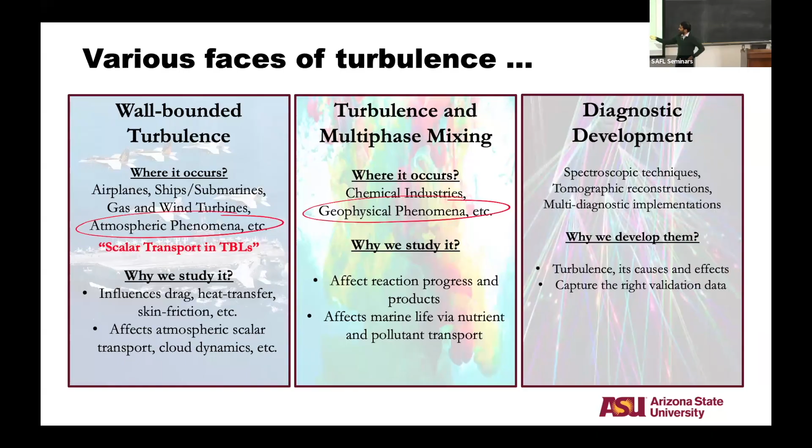For today, instead of going through all of those things, I'll focus on two specific aspects. The first one is scalar transport in turbulent boundary layers.

Is this working? Yes, it's working, I think. Okay, thank you for that.

So we're going to look at scalar transport within turbulent boundary layers. This basically marries my PhD work with my postdoc work. The other topic I'm going to broadly cover is separation over textured surfaces. These could look like very different problems application-wise, but the problems scientifically come back to what happens within a high Reynolds number turbulent boundary layer.

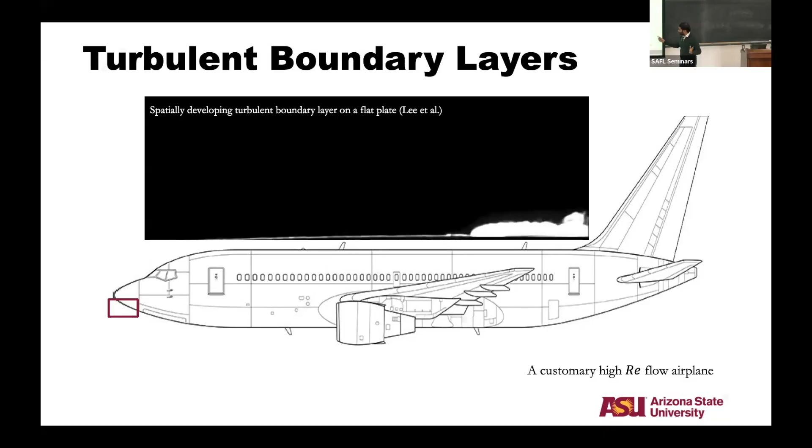I don't have to go through this in great detail because a lot of you here is already familiar, but just to establish nomenclature, and as is customary when we talk about a high Reynolds number boundary layer, here is an airplane. If we want to visualize this, we're basically overlaying water flows on top of an airplane to give an idea of how a boundary layer would develop.

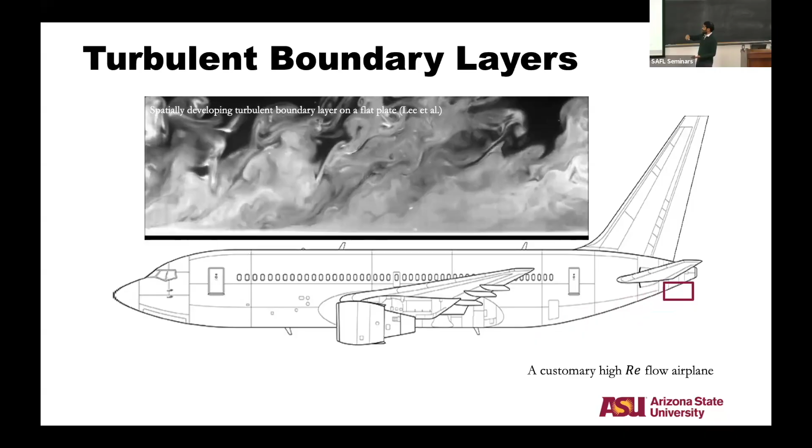As you see, as the boundary layer goes further and further downstream, you get a much wider range of turbulent flow structures, and the boundary layer gets much thicker. That basically is the essence of a high Reynolds number turbulent boundary layer.

The reason we want to characterize this is because we all live in one of those, and these turbulent structures are essential for transporting pollutants, particulate matter, etc. The other big reason we like to study this is because these occur over airplanes, like I just showed, and we spend ridiculous amounts of fuel to overcome the skin friction drag that comes and is modulated by a lot of these turbulent processes.

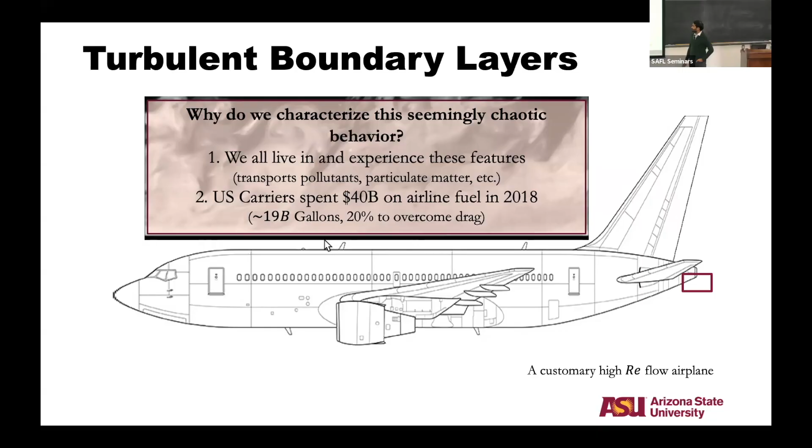Again, quickly redefining what a high Reynolds number boundary layer is, so that we're all on the same page - this is a very nice demonstration that Nick Hutchins from University of Melbourne once demonstrated. We can define Reynolds number as the ratio of the largest to the smallest scales.

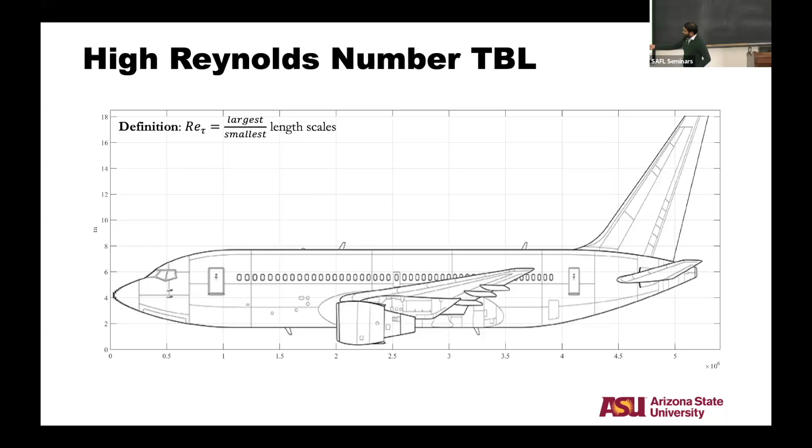If we look at the airplane and look at the boundary layer development as the Reynolds number increases, we like to look at it on a logarithmic scale. If we look at the log scale, one of the highest DNS, Re-tau of 5,200, is probably somewhere on the nose of the airplane that we typically travel in. One of the highest high Reynolds number laboratory experiments pushed this by a few tens of thousands from here.

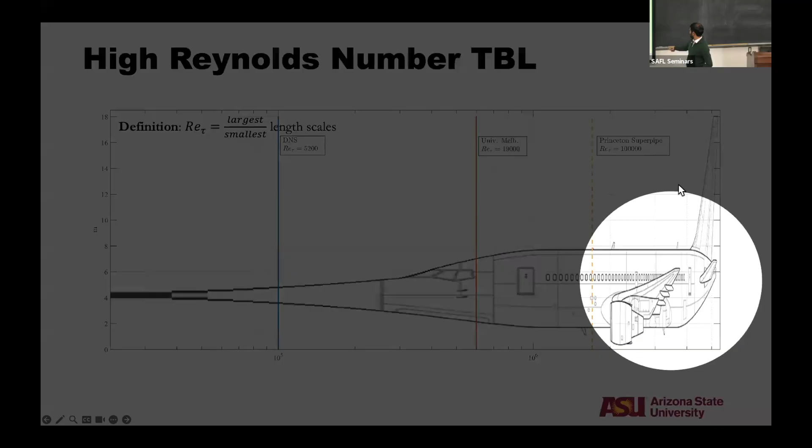So I'm talking about very well resolved turbulent boundary layers in a laboratory, somewhere in the cockpit, right? And if we look at the Princeton super pipe, they talk about very, very high Reynolds numbers within the laboratory, we're probably somewhere in the business class up there. So my coach class gives us very high Reynolds numbers, right?

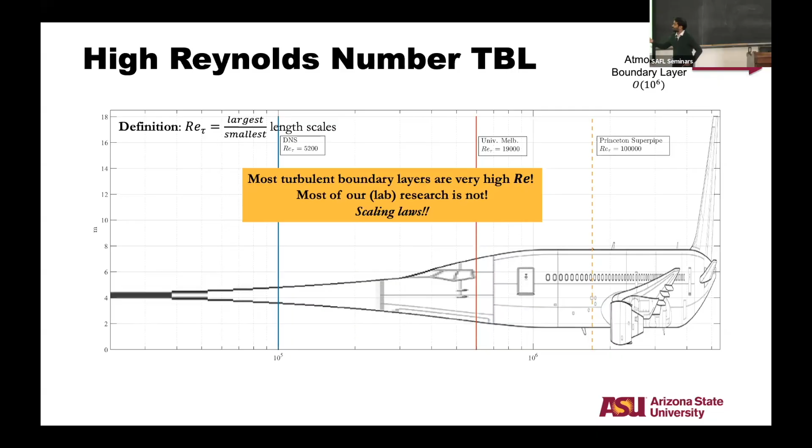An atmospheric boundary layer is probably somewhere else, right? We know that it's probably of the order of 10 to the 6. The point I'm trying to drive is most of our boundary layers are very high Reynolds numbers, but most of our laboratory research is not. And we heavily rely on scaling laws to bridge this gap, okay?

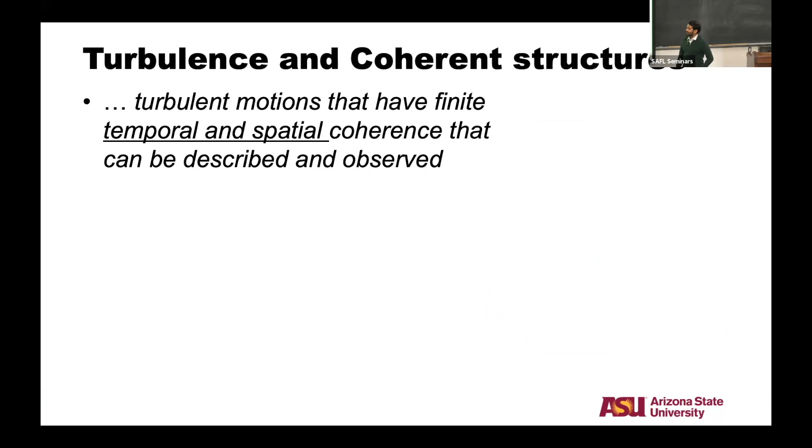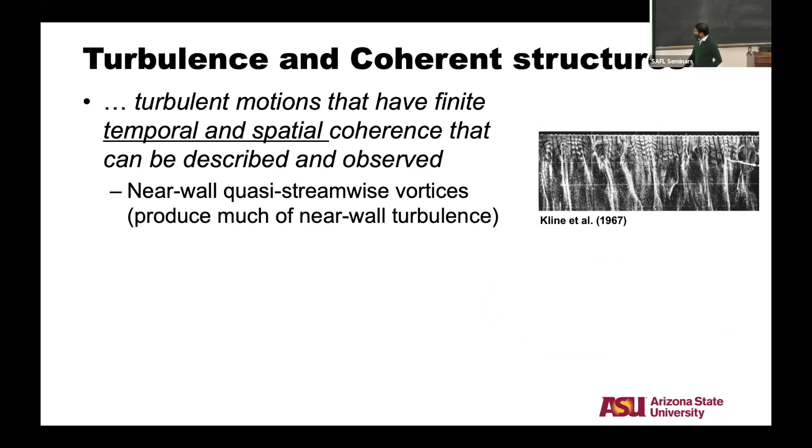I quickly also want to talk about turbulence and coherent structures. Coherent structures we can basically define as motions that have finite temporal and spatial scales that can be described some way statistically, right? And the most important ones, to simplify, are the near wall quasi-streamwise vortices, and the large and very large scale motions that happen outside of a boundary layer, in the outer regions.

We would like to pretend that these are Reynolds number independent and fairly universal. At least we like to pretend that way, right?

But what we are going to focus on is the large scale motions and the very large scale motions for our research, because these get stronger with Reynolds numbers, so they get more and more energetic, right? And they get larger and larger hierarchies as we go with higher and higher Reynolds numbers. They can be dominant producers of TKE at high Reynolds numbers because of the hierarchy they can occupy.

So if you're really looking at the high Reynolds number applications and processes, we really need to be mindful of what these large and very large scale motions are doing and their action on these things. So the theme of this talk, to phrase it formally, is: what is the role of the large scale coherent structures?

First, in transporting and mixing a scalar plume - this goes back to atmospheric boundary layers. And the second one is in initiating a boundary layer separation. The hypothesis we work with here is that these structures become really strong and are very susceptible to pressure forcing, and separation initiation primarily happens when these outer large scale structures become stronger and stronger, right?

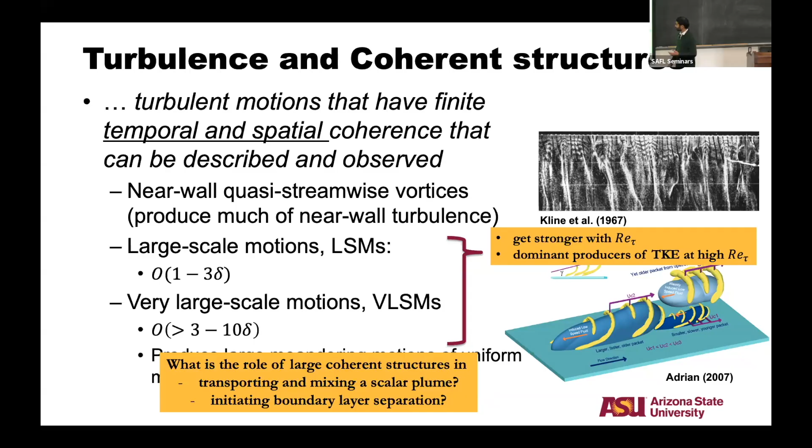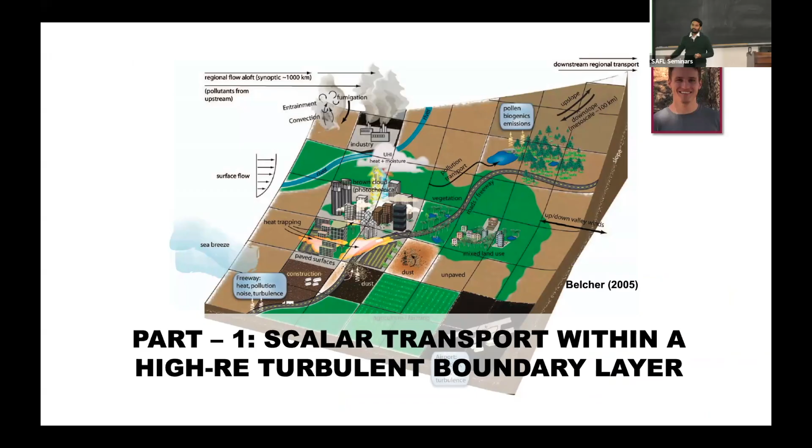But let's first talk about scalar transport within a high Reynolds number turbulent boundary layer. As always, I get to talk, but the real work is actually done by my student Isaiah Wall. He just defended and successfully graduated like a month ago, right?

We can very easily see why scalar transport in a high Reynolds number is important, because it's critical for pollutant transport, if you want to model odor nuisance in an urban environment, hazard analysis of accidental or intentional sources of hazardous materials, or source triangulation. So many of them are forward and inverse problems, easier listed than solved, right?

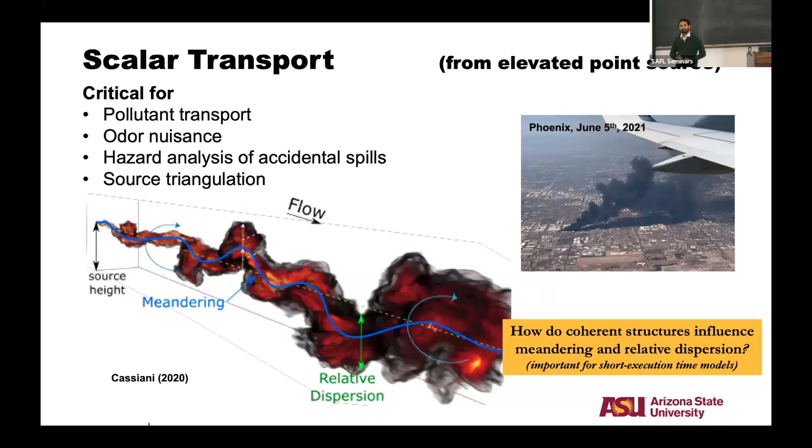As good academicians, if you want to take all the reality out of this, we'll basically look at this plume that's injected at a source height, and it meanders. We refer to this as meandering of the center of mass, and then it relatively disperses. The question we wanted to ask was, how do these coherent structures influence meandering and relative dispersion? Specifically, if I need a short execution time model that scales well and captures these high Reynolds number processes, what is the best way of doing this?

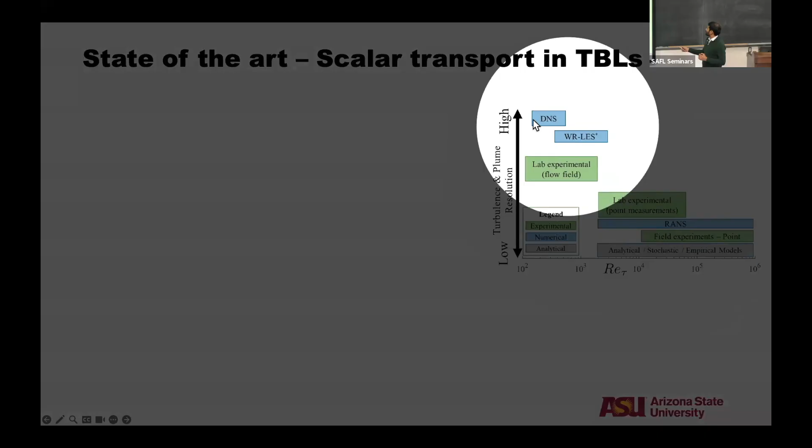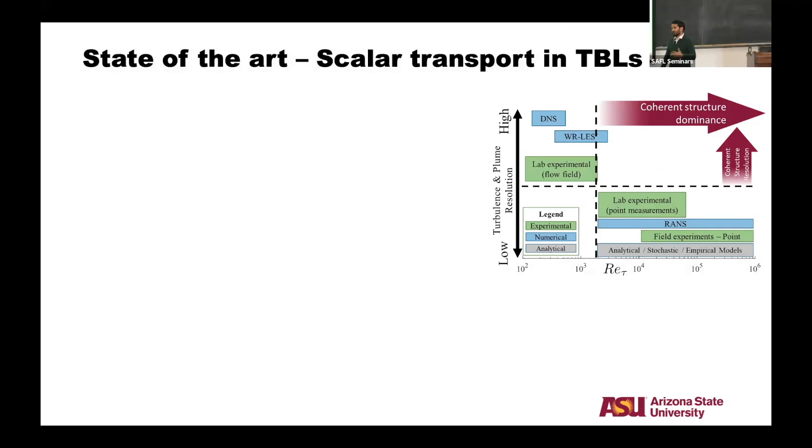But if you look at the lab experimental, LES, or DNS studies that look at specific aspects of plume transport, they're typically limited to low Reynolds numbers. This brings us to the problem: we need high Reynolds numbers to observe where these coherent structures are dominant, and we need high spatial resolution to resolve what these coherent structures are doing, both for momentum transport, which has been studied, and scalar transport.

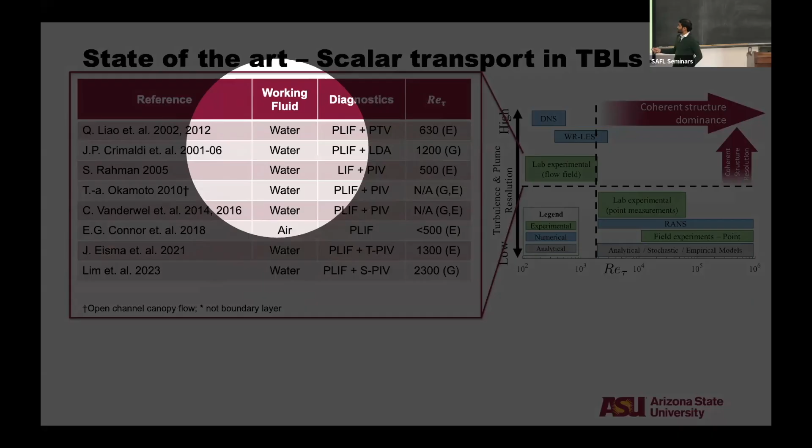If you look at the lab experimental flow field measurements, which is what we wanted to look at, I've listed these things, but I want you to focus on the fact that most of the structure-resolving measurements have been done in water. This is no accident, because it's much easier to measure scalar flow fields in water—fluorescence imaging is much easier in water—with the exception of one study.

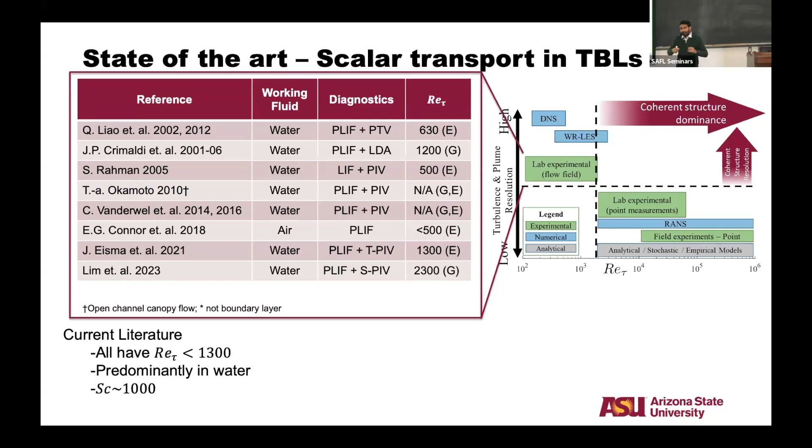So all of the current literature is typically on the low Reynolds number side, predominantly in water, which means the Schmidt number effects are very high. I haven't stated it here, but it's very hard to get large density disparities in water—we cannot have fluids that are three times as dense and still perform these optical diagnostics in water.

So the first thing we wanted to do was develop the diagnostics. Let's see if, using the more powerful lasers and more sensitive cameras we have, we can map out both scalar concentration and the turbulent velocity flow field within a boundary layer for a problem like this. We'll do this for a passive scalar in air, so the Schmidt number is of the order of 1, but the plan is eventually to extend this to higher Reynolds numbers where you get a decade of logarithmic layer, maybe a few hierarchies of the coherent flow structures.

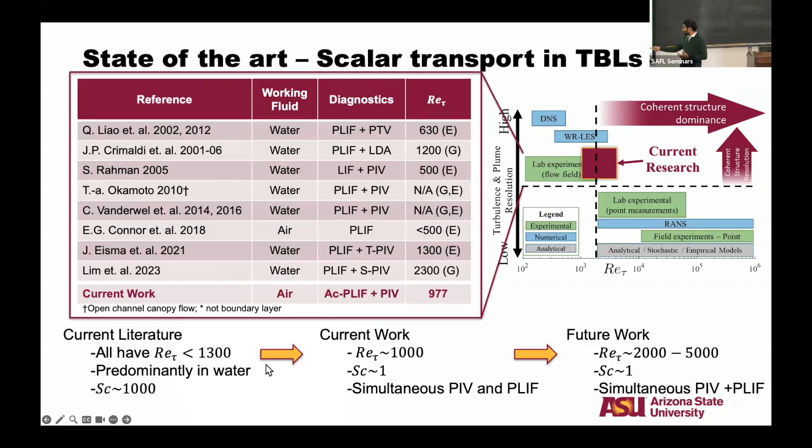And do this in a slightly bigger wind tunnel. So the first goal was basically to do these things, which is what I'm going to focus on for this work. We took a small wind tunnel that's much easier to work with than a very large wind tunnel, and we have 2 cameras.

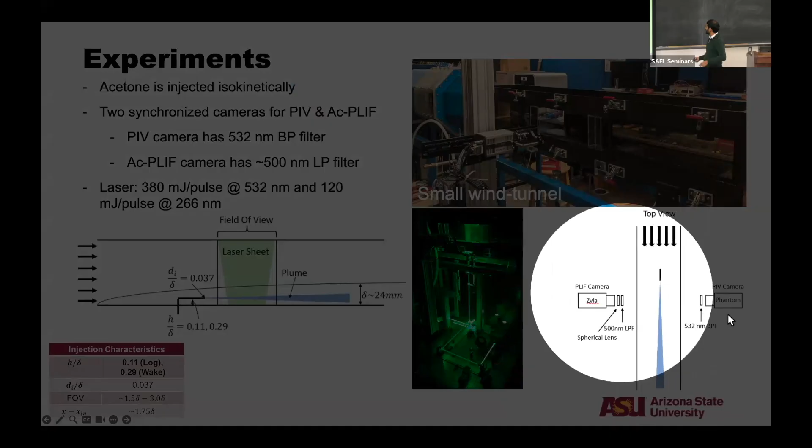We inject acetone through this injector. The beauty of acetone is it can absorb UV light and fluoresce blue light, so we can actually image this acetone plume. To image this from a top-down view, I have one camera that only images blue light, and another camera that only images the scattered green light. So you have a PIV measurement on one side and planar laser-induced fluorescence measurements on the other side.

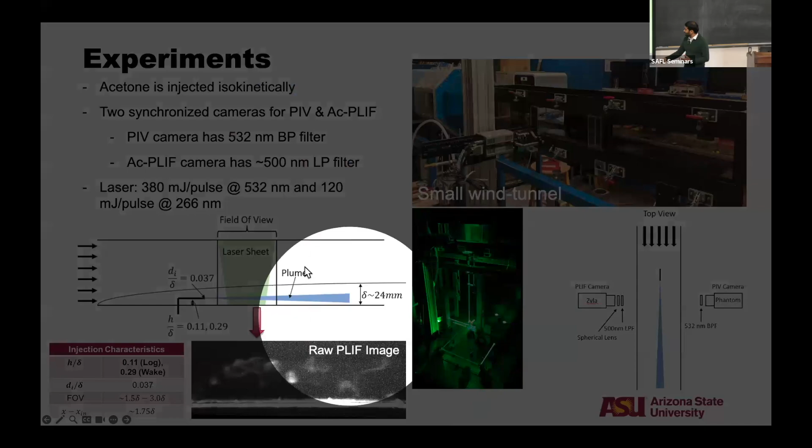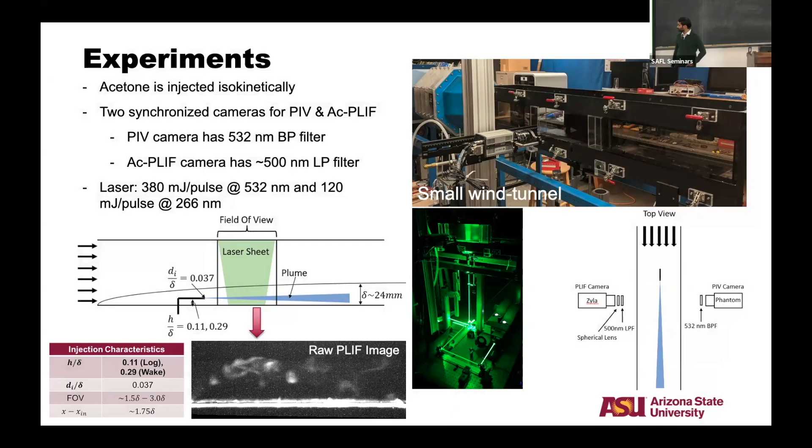If you take the raw image of PLIF, this is kind of how it looks, about a boundary layer thickness or so downstream from the injection point, which is where we were interested the most for this problem. Getting a raw PLIF image is easier than actually converting this image into mixture fraction measurements, because calibration of PLIF for acetone imaging is extremely hard, which is what we went about to do.

I'll skip the boring steps in between, but if you do everything right and the calibrations work out and you lay things on top of each other, you get pretty images like this.

So what I have here is a plume that's coming in. The contours are mixture fractions going from 0 to 0.7 of the scalar plume. This starts about 1.5 delta downstream, I haven't put the axis here, and you get the velocity vectors on top of it.

This is bandpass filtered, so I wanted to accentuate the turbulent structures, but you can kind of see that.

If I take one more snapshot, you can see the scalar flow fields and the structures that roll this scalar up. Wherever you have these low velocity stagnation points, sometimes the scalar accumulates as well. But what's happening here is basically a plume being injected continuously, and it's being rolled up into different packets here.

Okay, so we did 2 locations. The first location was the logarithmic region injection. Sorry, I have to be clear here - the injection is somewhere around here, so it's actually very close to the wall.

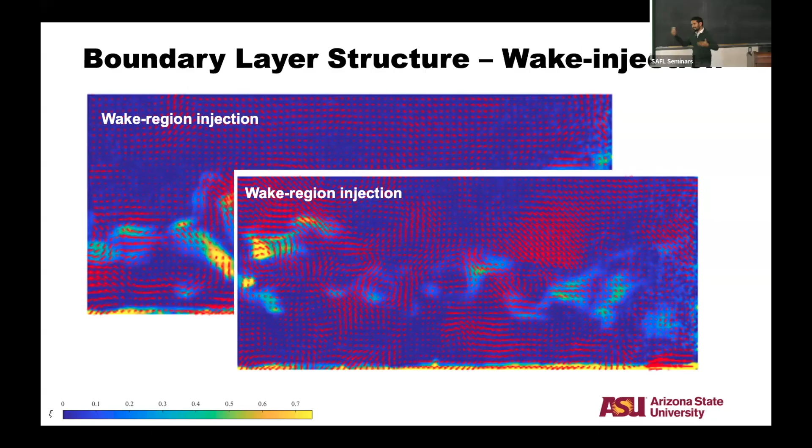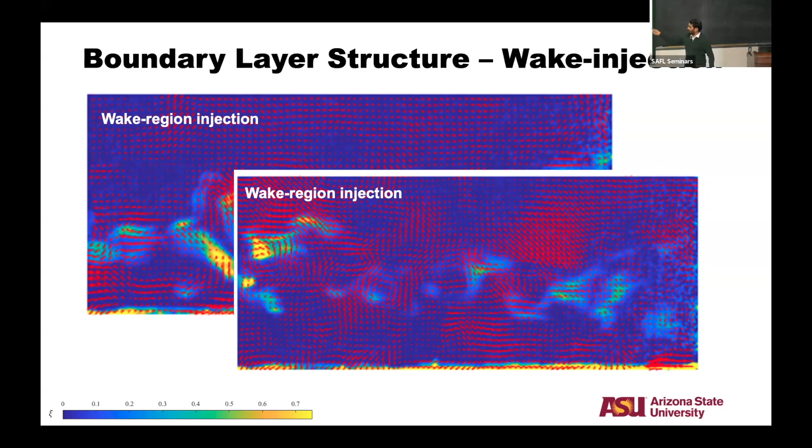The second injection is slightly further out, so you get similar structures. We investigated this for 2 injection locations - closer to the wall within the logarithmic region, and further away from the wall for the wake region injection - though I'll mostly focus on the former.

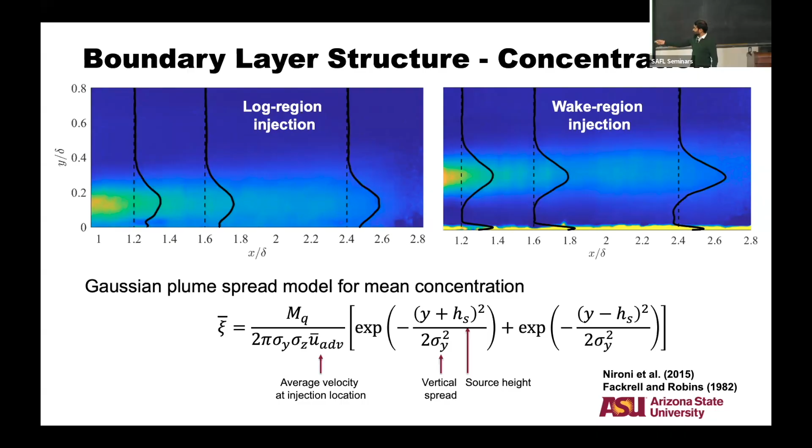Before we do that, just to gain confidence that we got the diagnostic right and it's actually quantitative, we took the mean concentration evolution and compared this to the classic Gaussian plume spread model, which says given some turbulent single point statistics, how should the plume spread in space. This problem has been studied for about 40 years, more than that, so we have well-tested formulations for such a simple configuration.

We compared the plume spread we see with what these models give. Basically, the solid line is the model, the blue line is what we see. This is for the logarithmic region, and this is for the wake region injection.

We see that our plume spread is much closer to the analytical predictions for the log region injection compared to the wake region. We speculate a few reasons for this, one primarily being that these models assume the point source is much smaller than the boundary layer thickness than what we have here. But other than that, we get reasonably good agreement with what the plume spread should be.

We also did more comparisons to other studies. Now we can actually compute turbulent fluxes because we measure them simultaneously, so we get wall normal turbulence flux and compared it to literature that used single point measurements measuring both. It agrees very well, actually, even in magnitude and trends to what was reported in the literature.

We discretized the blobs. The reason we're interested in this, in this region between 1.5 delta to about 3 delta, is because it's a region of very high intermittency. A plume comes in and breaks up into multiple discrete packets, so you get a highly intermittent flow with high concentrations of the injected plume and very low concentrations of the ambient fluid simultaneously.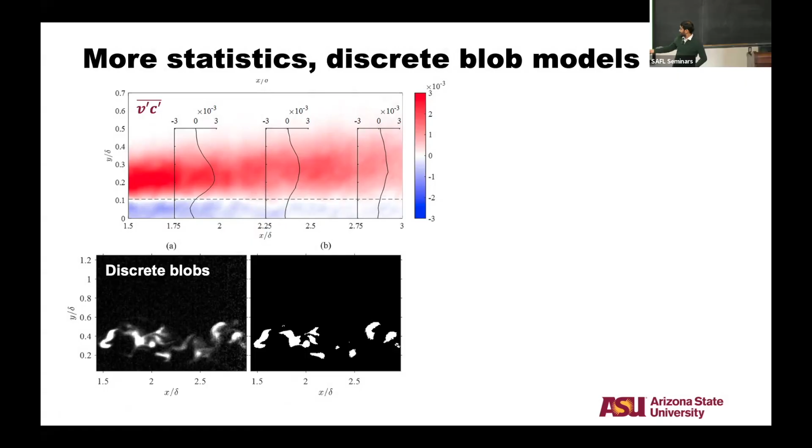So we looked at the spatial trends because now we could - we thresholded it and looked at what the size distribution of these things is, what the orientation of these blobs is for different injection conditions, and so on, and how these blobs evolve as we go further downstream. So we had like a plume breakup model. I can get into more details on any of these if you're interested.

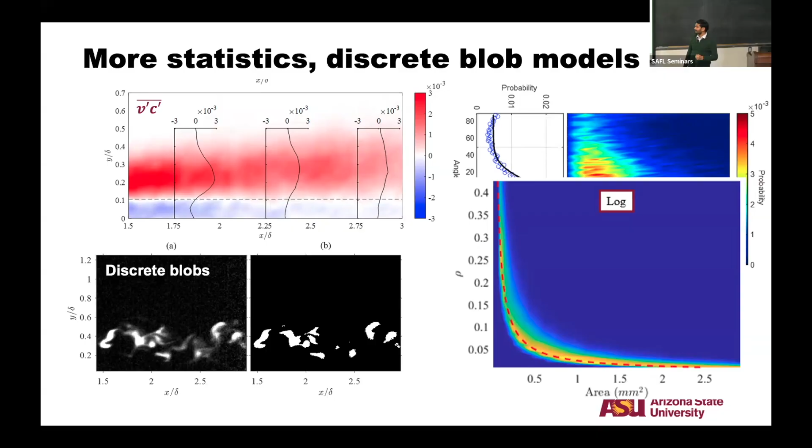But I wanted to go back to the motivation of our talk, because we set about doing all of these things to learn what the influence of the coherent structures is.

Let's talk about how we identify the coherent structures, how we define this. We define this with a coherent vortex packet. So if I ask you how many vortices you can spot, you can basically spot one vortex here, maybe a vortex there, maybe a vortex there. This is like a snapshot in velocity of the vortices. So there is one there, one more there.

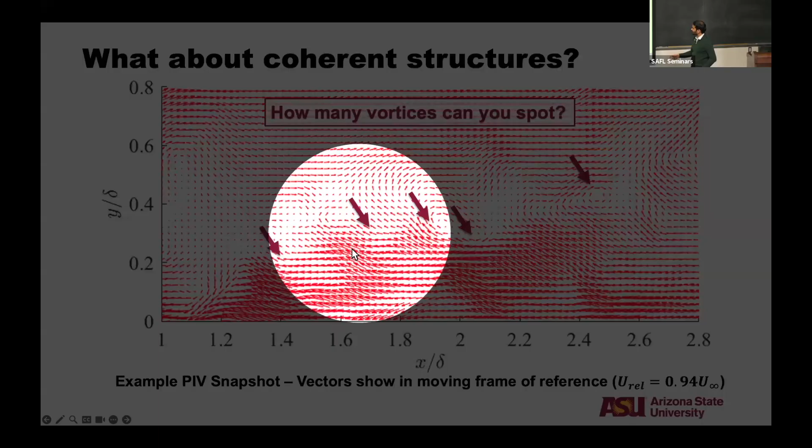The reason we don't see this clearly is because it's actually moving at some velocity. If I look at it in the local frame of reference, this vortex pops alive. It looks like these two vortices are moving with certain velocity, these three are probably moving with a slightly slower velocity. So there are these groups of vortices that move together, which is what we call the coherent structure in the textbook case, inclined at a certain angle depending on the packet and how you draw them. These angles can have different values.

But the reason I knew that these vortex heads were there was because I looked at the contours of what's called a swirling strength. This is related to the eigenvalue of the velocity gradient tensor. Anytime I have a very high value of swirling strength, it basically tells me there is a swirling motion locally in some frame of reference. So this is frame invariant. This is kind of how we identify these vortices and have traditionally identified them.

None of this is new, I just wanted to put this here so we're all on the same page. This is a slice of this coherent vortex packet that many of you would have seen hundreds of times now. But all I'm trying to say is I'm going to relate this vortex arrangement to my swirling strength field going forward, to look at the scalar trends.

So if I look at the scalar flow field on top of these coherent packets, a trend seems to come alive. I have a vortex packet, a vortex head here, and then a blob of scalar here. I have another vortex head, and then there's a blob of scalar. It's the same thing. Sometimes the vortex seems to kind of strain this out around the inclined shear layer. So this is a very, very strong trend.

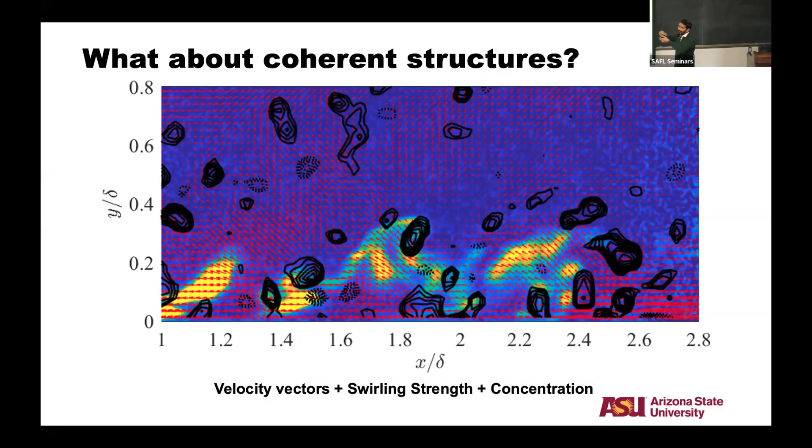Then if I show you one more packet, you kind of see one more thing: another vortex head, a huge blob, a vortex head, a scalar blob, and so on. So what we have is vortex heads that are inclined, which we already knew. But what we also see is that in this region where the plume is being stretched and strained in a highly intermittent fashion, the scalar also places itself between these vortex heads. So they're basically ripping apart this scalar plume in a very coherent fashion.

So if you ask me the question of what is the role of large coherent structures in the plume meandering, dispersion, and breakup, my answer from these observations would be that you have a strong preferential local arrangement of scalar relative to these coherent vortex heads.

But if you are a turbulence researcher, you're going to question me. It's like, hey, you might probably pick the two best looking figures and show this to write this narrative - what's to say that this is a very dominant phenomenon? And you would be right, I did pick the two best looking pictures to demonstrate this process.

Though if you take my word, it's not hard to find this at all. About every fourth figure that we saw kind of had this arrangement. And for this arrangement to happen, the coherent packet has to line up in a certain way with the injected plume. So it's not always this, but it's not hard to find this either.

And more specifically, we found this: the injection is happening around 0.1. We found this anytime there is a high concentrated region far away from the injected location.

If you keep staring at it for many days trying to find trends, you'll realize that anytime a plume reaches far away, you see this coherent arrangement. That's almost one-to-one in my experience—anytime I see it, it gets there. So that's what we set about doing: can we show, in a statistically significant manner, that this actually occurs every time a plume appears?

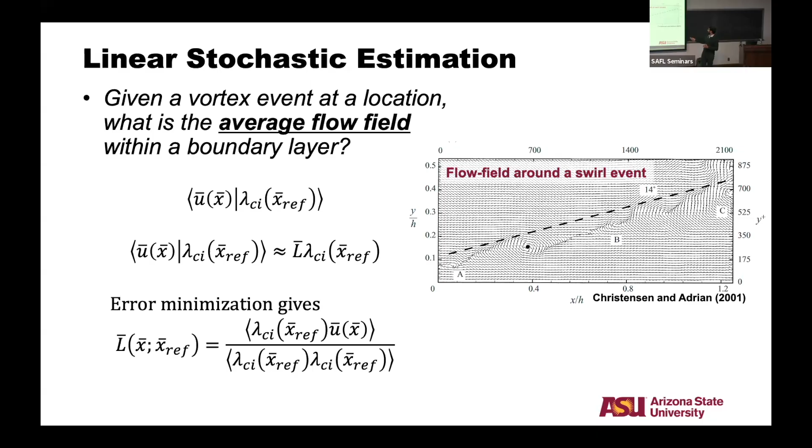I'll skip the details, but we basically take the approach of linear stochastic estimation, where we estimate a conditional average to the first order as a kernel times your conditional event. The kernel turns out to be a two-point correlation for a scalar, and this is what was used to actually identify the coherent vortex packet.

For example, they picked a swirl event locally and looked at the direction of the velocity field, and they saw that there are coherent packets—there's this long distance coherence with an inclined shear layer that shows up. This is how they showed that these coherent packets are also statistically significant, which is what we're going to use.

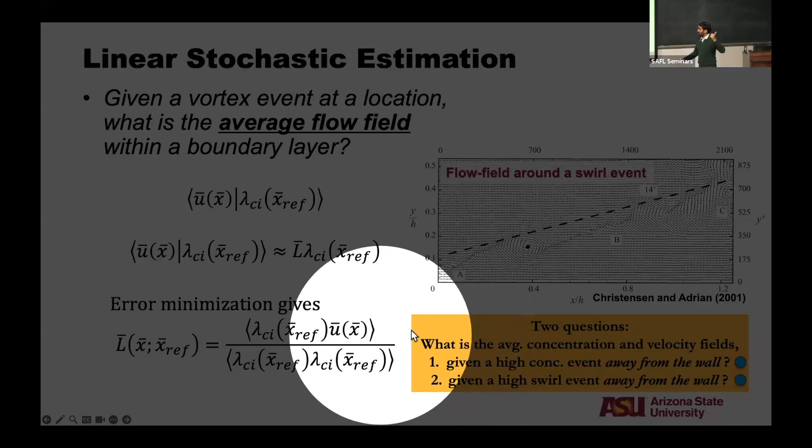So I'm going to ask two questions in the following slides. From my qualitative description, given a high concentration event away from the wall, what is the average concentration and velocity fields? I'm going to look at the average concentration and velocity fields given two conditional events. The first event is what I described: every time something is far away from the wall, you see this arrangement.

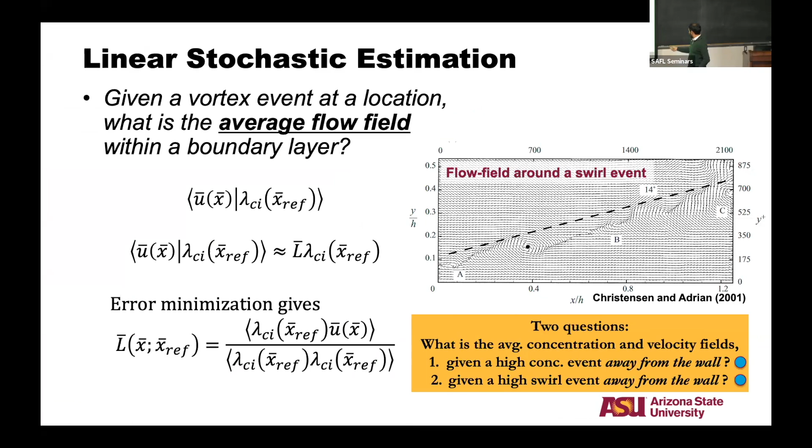The second question is: is it bidirectional? If every time I see a swirl event away from the wall, do I also see the correlation? I'm going to use these blue dots to show the conditional event—wherever the blue dot is means I'm using a large fluctuation of a quantity there. With that, let's look at that.

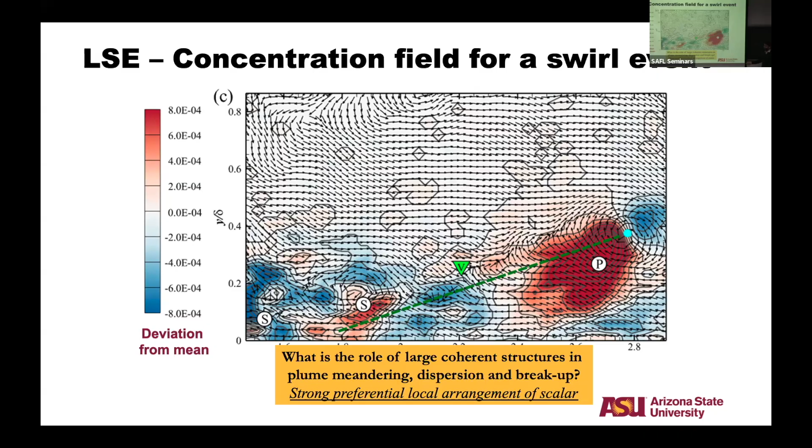Okay, we did a few more things. We basically said, if I pick the secondary blob, will I see the primary blob? And the answer seems to be no. So in other words, a strong concentration event here is not necessarily the action of a coherent packet - it could be an incoherent event, meaning the turbulent flow field. Different things can happen; it doesn't necessarily mean you'll have a strong high concentration event downstream. So there are other breakup mechanisms outside of these coherent packets - it's not the only turbulence that exists.

But if I pick a strong swirl event here, I do tend to see, again, there is a vortex and there is a blob here. So again, these are entirely independent events that we pick. If I pick a strong swirl event here, I also see weak primary blobs, what used to be primary blobs earlier on. So what I want to say is if I have a coherent packet, they usually result in a high concentration further away from this. So this was very encouraging.

At this point we were fairly confident - I'm not showing this here, but we also just did brute force conditional averaging. We basically took the two events and just picked the fields that have that thing, and we basically see the same structure. So it's not even dependent on the type of conditional average that you do - you just have other artifacts with that thing.

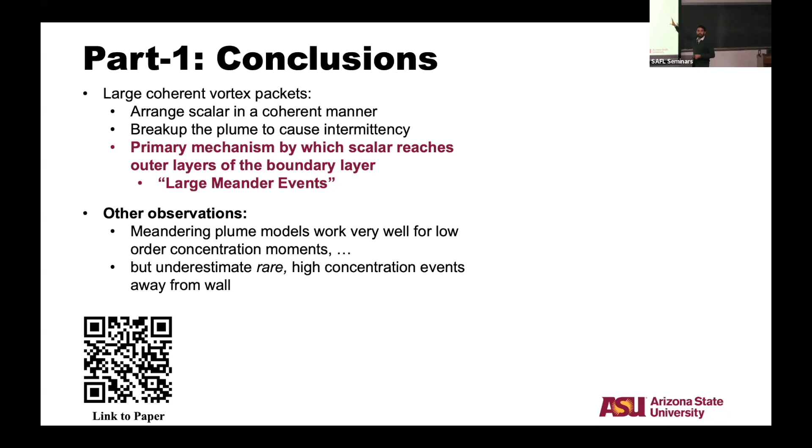So the conclusions for this effort were basically that large coherent packets arrange scalar in a coherent manner, especially immediately downstream, which can have long effects later on. But the most important thing is they were the primary mechanism by which the scalar reaches the outer layers of a boundary layer. We call this large meander events because this is important. If a high concentration blob reaches the upper layers of a boundary layer, it can get transported a long distance without dispersing.

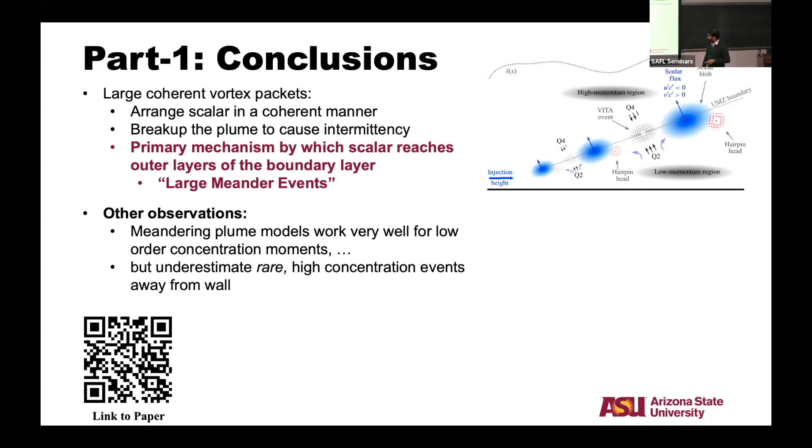So this would be very important. And we prepared a schematic that integrates this paradigm with our existing understanding of the coherent structures. For example, you get a uniform momentum zone, hairpin heads, like the features and the scalar blobs lined up with this. We just published this in a JFM paper that came out a few months ago.

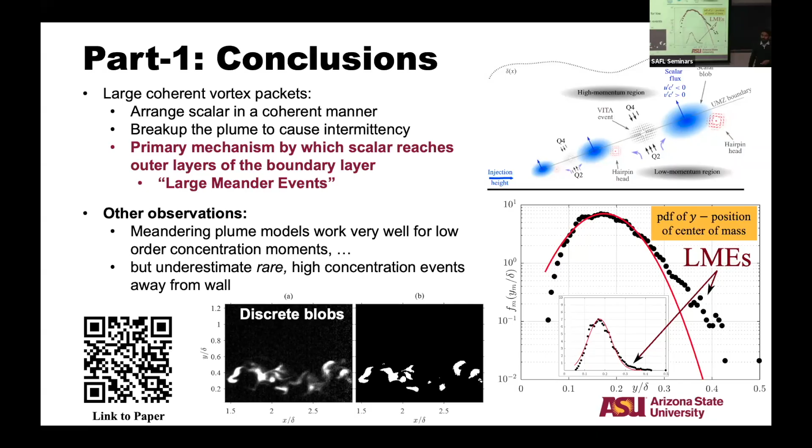And we also looked at, if you look at these blobs, discretize this and track the center of mass of these things, how they occur, that's typically predicted using a Gaussian plume model. So this is the curve that you can typically fit with. And if I do the best Gaussian plume model fit for this thing, on a logarithmic scale, you get these rare events of large deviations off the plume away from the wall, which I believe is the action of the coherent structures. So that was the outcome of that effort.

Completely different in experimental effort and analysis, looking at atmospheric scalar transport of a point source. And I'll just take a full pivot in a different direction, where we look at unsteady flows, separation, and rough textured surfaces.

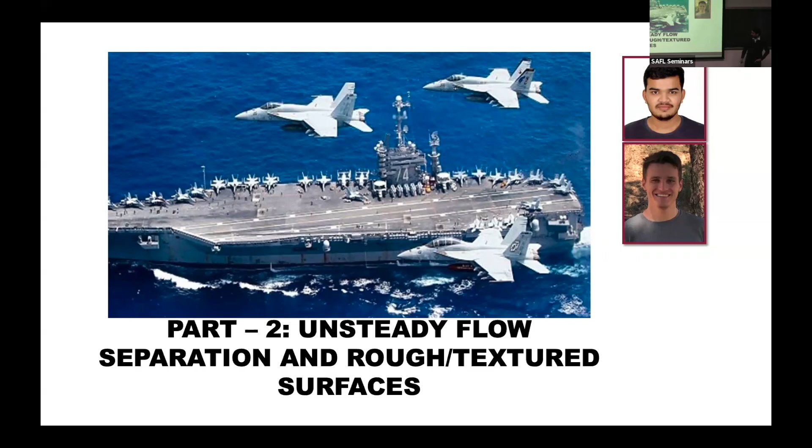Okay, so the motivation of this research, okay, and I'll tell you once I get some water.

Again, if you have a theoretical and applied mechanics degree, this is what an airplane looks like to you. So we have an airfoil flow going around it, and we have the boundary layer there. Aerodynamicists ignore it until they cannot ignore it, because if it separates, it alters the vehicle scale aerodynamics. So it actually alters the inviscid flow around it. And it can be unpredictable, sudden, hysteretic, all of those things. We have more than 50 years of research on that thing.

But the thing that we wanted to attack was everything gets worse in unsteady conditions. So if you have a gusty environment that your plane is going through at high angles of attack, it just makes that much more unpredictable. The other effect is the wing-in-ground effects. If you have a plane flying very close to the ground, or very, very close to the sea or high seas, the ground effects also make these much worse.

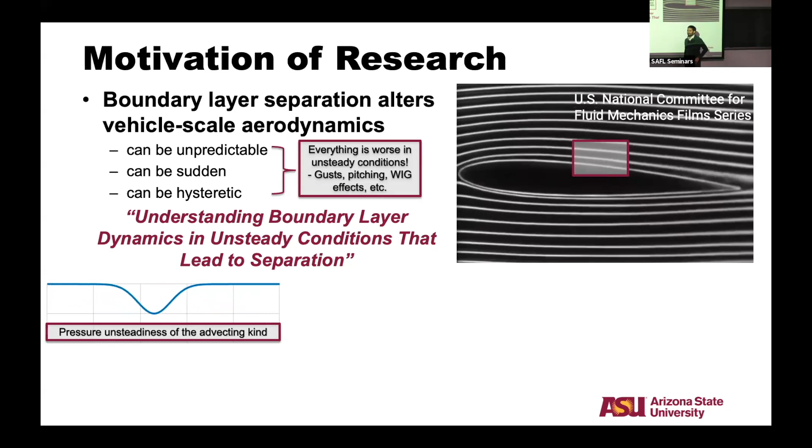So our effort was directed on understanding boundary layer dynamics in unsteady conditions that lead to separation. And when I mean by unsteady conditions, again, for a TAM person, I'm going to have a flat plate boundary layer, that's either subject to a mean pressure gradient or not. And then I can have a pressure gradient, pressure unsteadiness of advecting kind. So I can basically have, let's say, a free stream vortex that moves, or if you have a wing-in-ground effects, you go on top of a little hill.

So that would be this disturbance on the lifting surface. The other thing is pressure unsteadiness of the global kind, where the pressure everywhere is changing in an unsteady manner, which is what would be happening if you have a pitching airfoil. And the goal eventually is, can we engineer textured surfaces to make separation more resilient in these things? So it's not to entirely prevent separation, but if you have unsteadiness, can you have a boundary layer that's better at dealing with it than a boundary layer that's largely susceptible to this thing. So it's more of a separation resilience study.

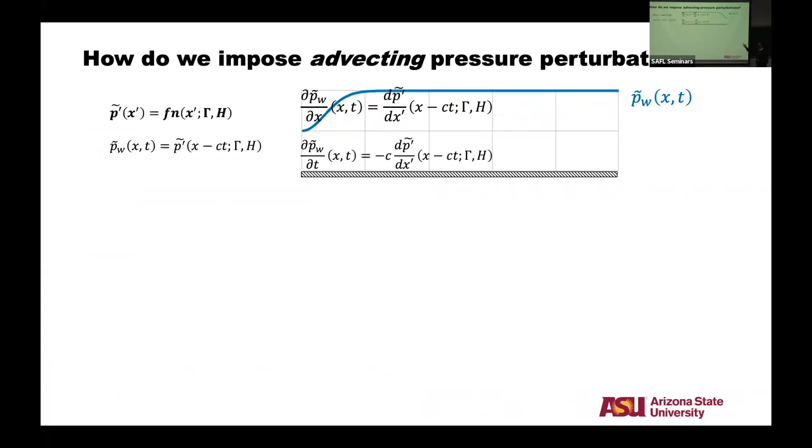A quick highlight is I'll present aspects of these things. This is very much in progress. So the first thing is, how do I first, in a very clean fashion, impose a pressure gradient of pressure perturbation of an advecting kind? We picked basically a vortex-like flow. So for example, if you have a vortex that advects further downstream on a lifting surface, this is very similar to what we would have.

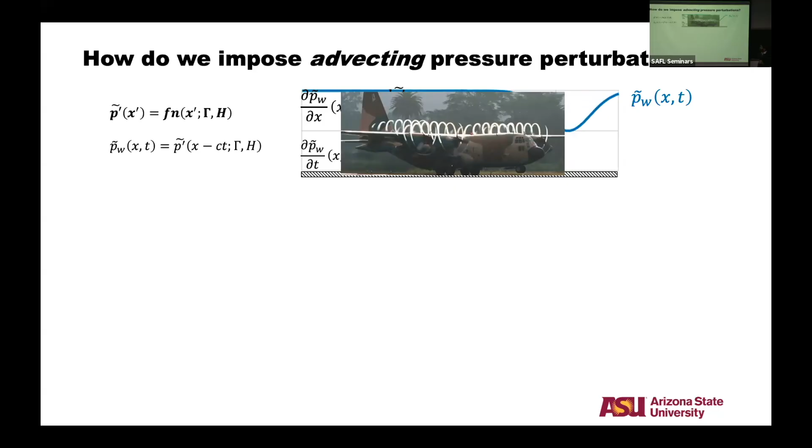We do this in a collaborative sense. There's a team at Auburn University that does the aerodynamics of this - they use a real vortex and an airfoil.

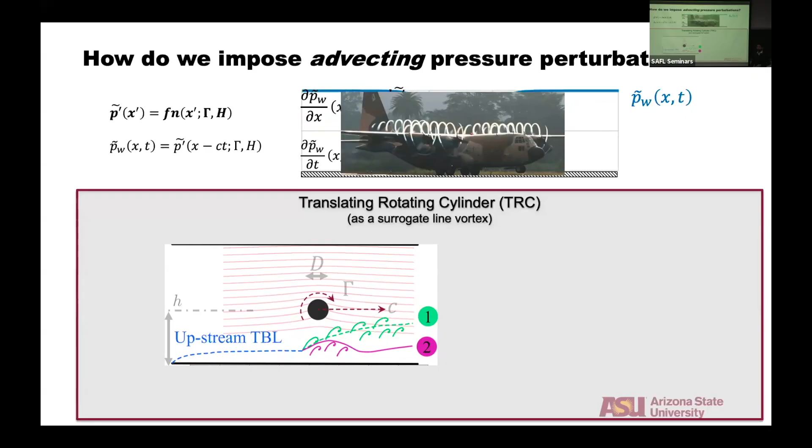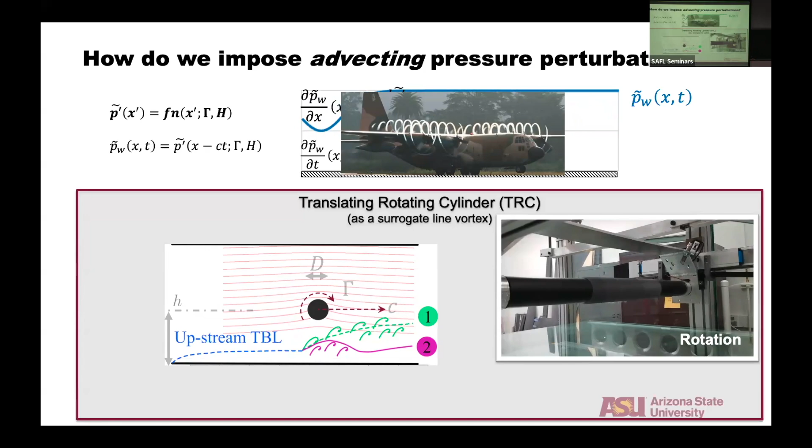What we do is take a translating rotating cylinder. It's span-wise aligned, it rotates and translates, just like the name says. We want to see if this can be used as a surrogate for a line vortex, since it's clean and tractable, controllable, as opposed to a real line vortex. So we built a rotating cylinder that can also translate.

That's the test section, and it's moving at some speed. This can actually move up to 8 meters per second, so it gets pretty scary once it starts doing that. We use a linear actuator to move the translating rotating cylinder. But the question is, does it behave like a vortex?

To answer that, we said let's forget about the turbulent boundary layer - it's messy enough as it is. We said let's just see if this can induce an axisymmetric flow in the frame of reference of the free stream, where there is no flow. We built this so the cylinder can have a certain height away from the wall - it's a vortex next to a wall. It can have some RPM, gamma, and some translation velocity c.

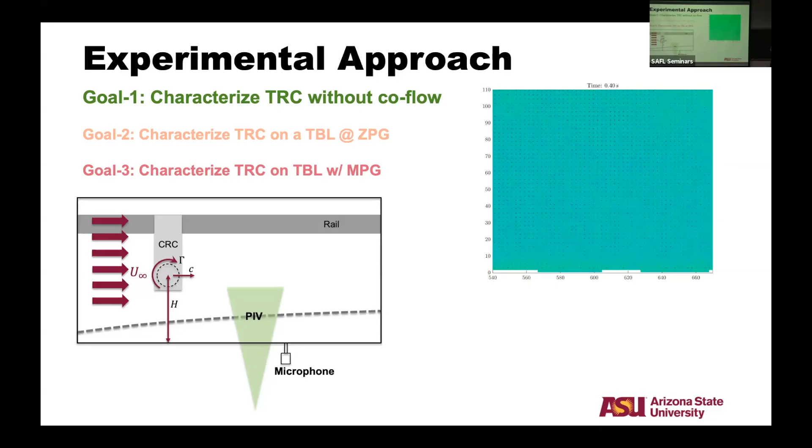We did PIV that looks like this from the camera's frame of reference. We also put a microphone on the wall to measure the pressure perturbation there. A microphone on the wall gives you a pressure sensor signal like this - these come pre-calibrated and pick up everything outside the pressure, so we filter it to get just the pressure imposed by the cylinder.

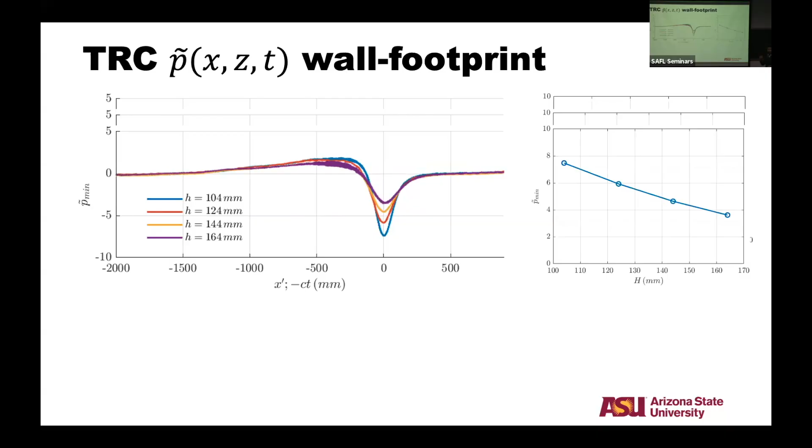We did a whole sweep. First, the role of RPM - if you increase the RPM, your pressure peak increases. Then speed - we increase the speed. Then different heights, moving the cylinder up and down - the closer the cylinder, the stronger the pressure perturbation. This shows how P min goes with H: as H increases, P falls down.

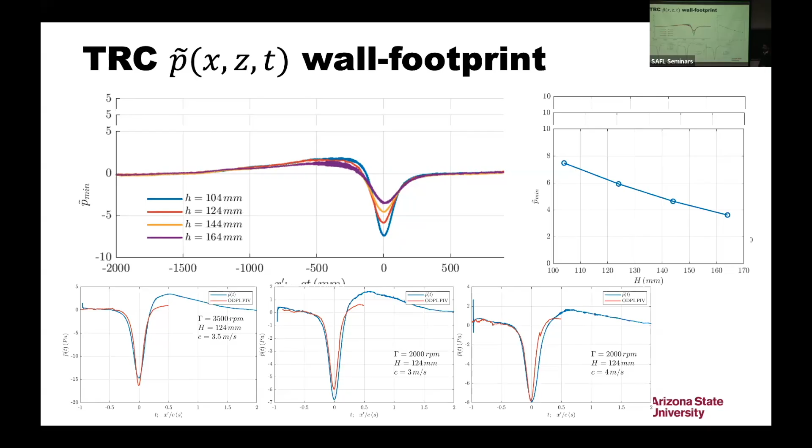We also had the PIV velocity fields, and we didn't trust the microphone just yet, so we wanted to estimate the pressure signal from these PIV fields using some pressure estimation method. There are many ways of doing this - we used what's called an omnidirectional pressure integration method, a really nice paper and technique I'd recommend. We were pleasantly surprised how well they agree with each other - completely different diagnostics, only related through the Navier-Stokes equations. The agreement looks like this for all the cases we studied, so we know the microphone and velocity information are capturing exactly the same information.

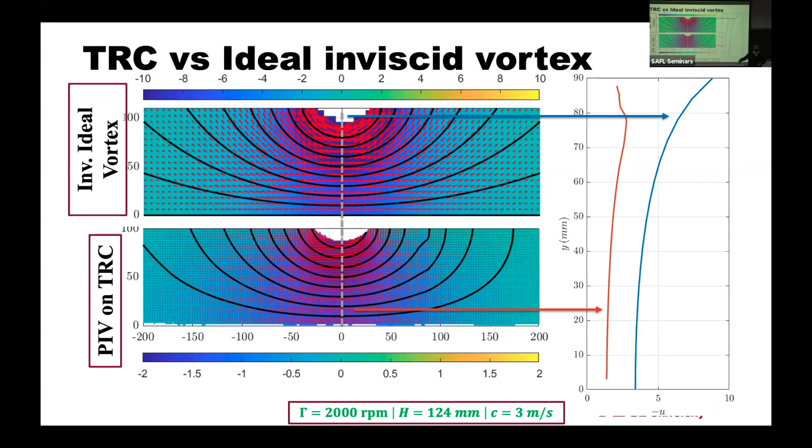Obviously, I have lesser negative velocity, minus U, because of the viscous effects than I would have if it was an ideal vortex. But the question is, I don't want this TRC to be a one-off thing. Can I actually relate it to my ideal vortex somehow through flow?

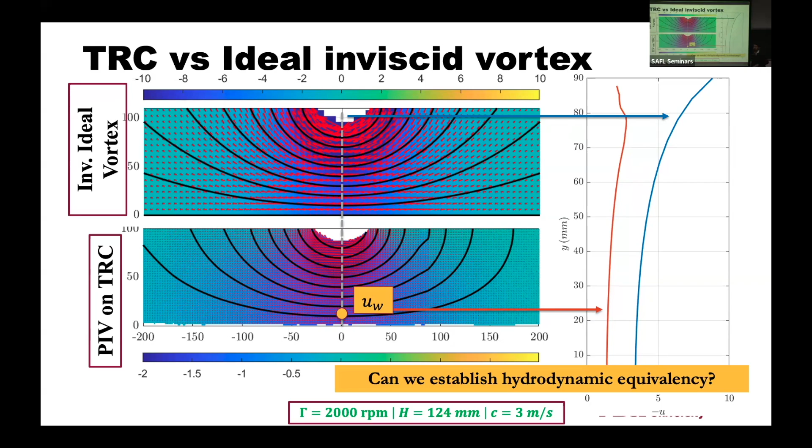We started with the most basic things. We picked the U wall of this and U wall of that, which is what we're interested in, what it does on the wall, and just normalized the velocity fields to see if we can establish some similarity. And so that's what we took.

There are a few aspects here. There are some viscous aspects I can get into if you talk to me later. We know why this deviation happens, and this deviation is very encouraging.

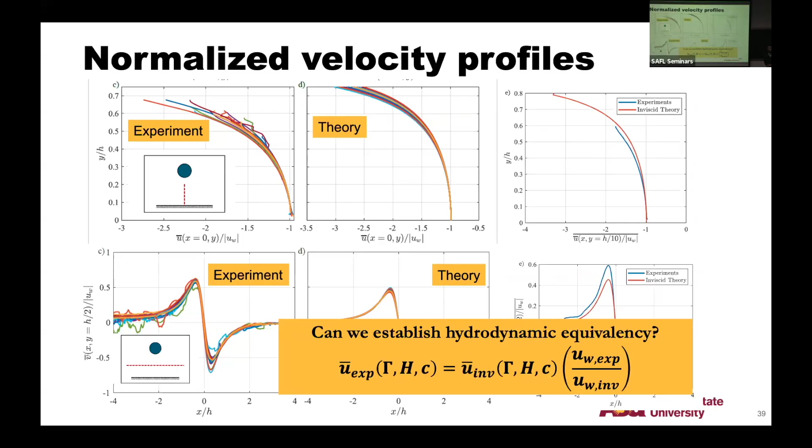So the thing we wanted to take out from this is: this TRC mechanism is a fairly good representation of an inviscid vortex moving in the free stream, in the frame of reference of a free stream.

The last thing—I'll quickly zoom through these things in the last 5 or 7 minutes I have. That was good. Then why did I say... why are we doing this?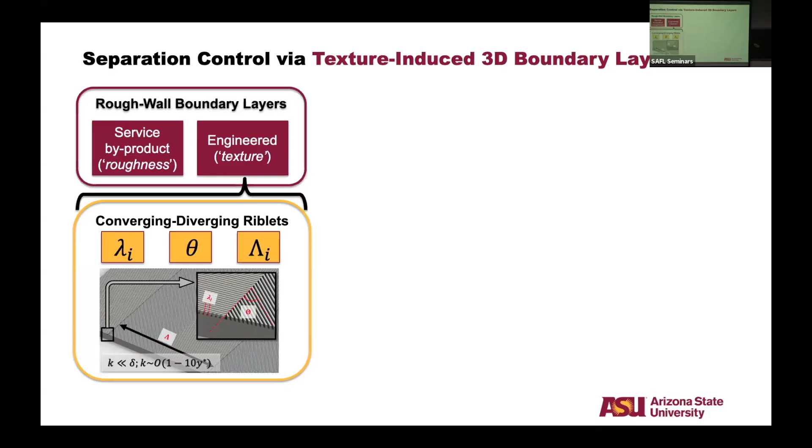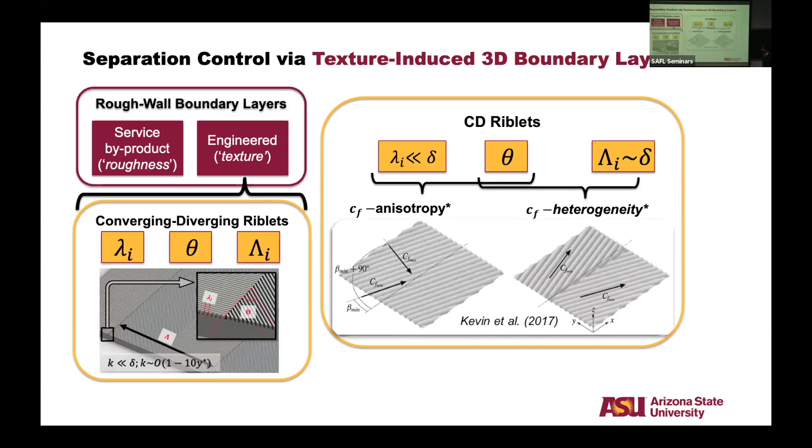We basically want to do separation control using textures. I won't get into too many details, but the way I define textures is: it's roughness if I didn't create it, it's textured if I created it, quite literally. If I say this is the skin friction profile on the wall, and I manufacture it, then it's texture. But both will have inhomogeneities in skin friction—this is span-wise wall normal plane—that would then have high momentum here, low momentum over regions of high skin friction.

So you can use skin friction to weakly control the momentum on a flat plate boundary layer. Our idea was, well, can we use the same strategy to control the separation? There is a reason we felt this was a viable strategy—again, I don't have time to get into that, and I'd be happy to talk to you about more, like what hydrodynamic argument actually says this could be a viable strategy. But what I'd like to show is that you can use this, and it's showing actually a response.

And the thing I want to focus on is these textures are very, very small. If you look at the riblets, this is the boundary layer, the riblets are here, so this box is entirely fit in there. So these secondary flows are not structure-driven flows.

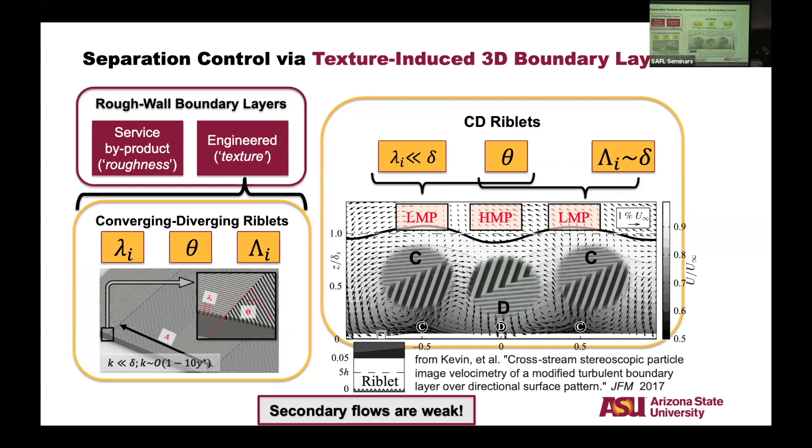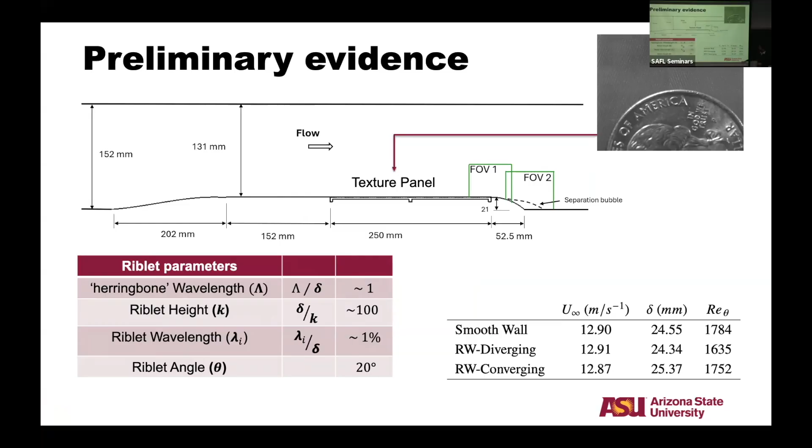These are skin friction imposed inhomogeneities in the boundary layer. If we lay such a roughness panel on top of a flow, so flow is from left to right, it kind of just separates. This is the smooth wall, and this is the divergence. This region has higher momentum, this region has lower momentum—two planes in the spanwise direction with high and low momentum regions. They're about half a delta apart, but the turbulent kinetic energy is about 25% different. So the boundary layer inhomogeneity is weak, but the moment you subject it to pressure forcing, it amplifies everything.

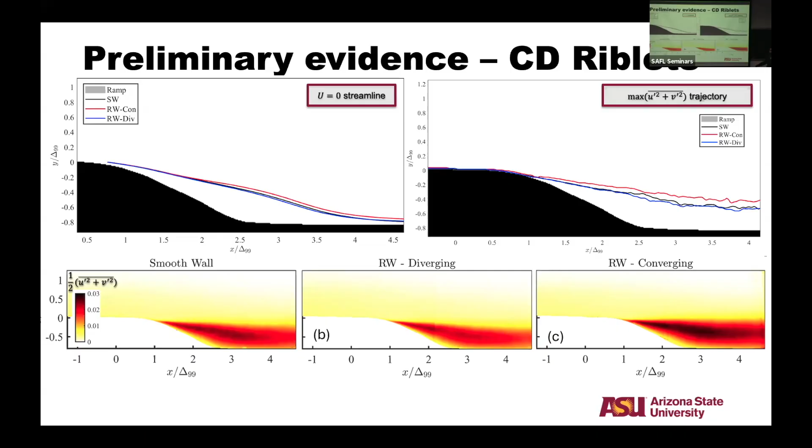So this was the preliminary data. We are doing a lot more sanity checks on this to make sure what we see is not an accident.

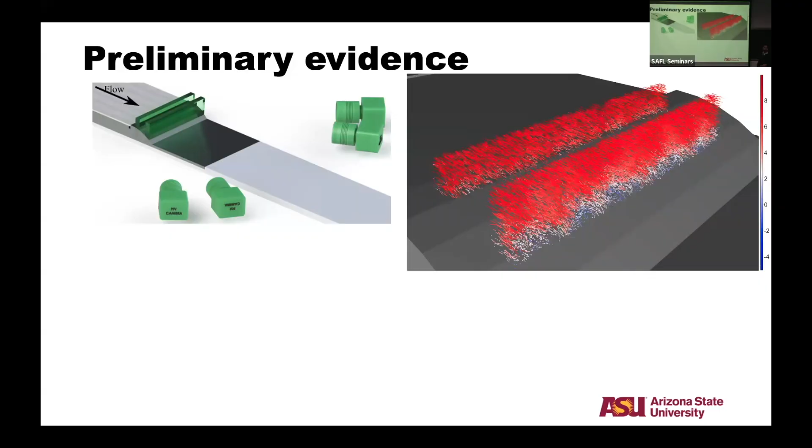My student basically went to town with this. We got this 4-camera high-speed particle tracking system, and I'm showing 2 planes here on top of that ramp, but it's swept with 8 planes, so we have a full 3-dimensional representation of what's happening with the flow. He's still processing it because there's about 200,000 vector fields taken at 6 kilohertz.

If we do a short average in the spanwise wall-normal plane, the contrast is not very clear, but there's a blue blob here that represents flow inwards, and the flow is coming out here—this is the reversed flow. We see that it is spanwise inhomogeneous, where you have high momentum pathways in the weak regions, with stronger attachment, and low momentum regions with weaker attachment of the boundary layer. At minimum, we could say we have localized differential separation—a spanwise differential in the stability of the boundary layer to separate.

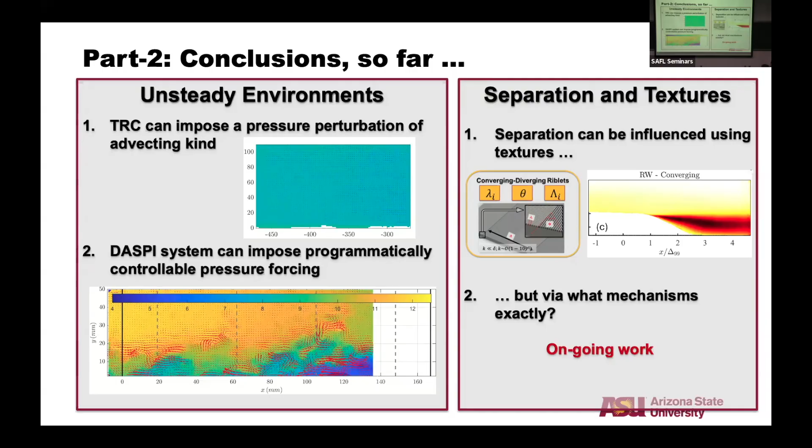So that brings me to the conclusions. I've covered a lot of these things. For this part, TRC can impose pressure perturbations—I did not get into this, but it's imposing a pressure gradient by wall aspiration, another crazy system involving about 400 fans controlled by a computer. We've shown that separation can be influenced using textures—why, we don't know, but we have data to look into this. We have efforts on a much cleaner flow to give us more information on what turbulence is doing, like how this cascade is working. Hopefully I'll have answers for these things in the next year or so.

So that's an overview of the work—three different forms. I hope I've covered systems development for flow control, turbulence separation, and scalar transport in the boundary layer, as I promised early on. This is all the work of my PhD students, master's students, and undergraduate students at ASU. Thank you very much, and I'm happy to take questions on any front.

Thank you. Thanks a lot. Any question from the audience? I think Judy has a question. Yeah, very beautiful work, very impressive.

I'm just wondering if you consider the advection of the coherent structure for your first work, and do a spatial average. How much difference would it be to resolve this coherent structure and estimate the dispersion versus simply using some semi-empirical equation to estimate the turbulent dispersion coefficient? How much difference would it be?

So if I understand your question right, regarding the coherent structures—we don't have time-resolved data of this thing, only snapshots. They're either there or they're not there, and we don't have a time history of how they got there, so it's very hard to do this in a spatially averaged sense, because you'd be averaging across different mechanisms of transport. Sometimes it's the hairpin packets doing this transport, other times it could be something else. So if we want to selectively isolate the mechanism, we need some selective process. With temporal history, we could do a little more using Taylor's hypothesis and some growth theory, but I don't know if we can do it with the data we have. Does that answer your question?

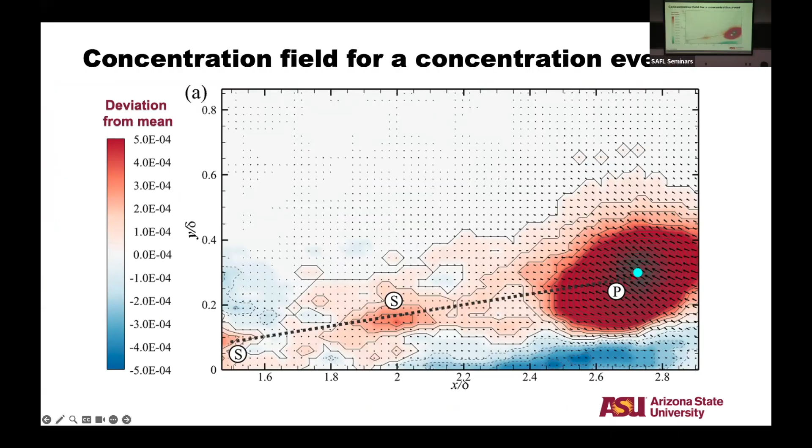This is average based on concentration. Okay, so this showed the three blobs. And this is the average based on the swirling strength. I think the next slide you showed averaged based on concentration for the second blob. Oh yes, this one. Give me a second. Yes, this one. I'm trying to understand why it did not show the further event.

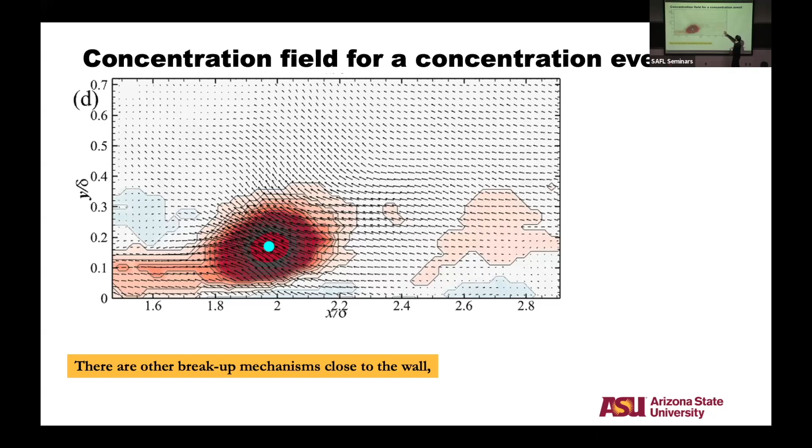So this other event is being drowned in the occurrences. Sometimes this blob occurs with another blob there, but that's not the norm, that's more of an exception. That's what this plot shows, at least. It basically shows that if it occurs here, sometimes there is a concentration event there, sometimes there is not. So this correlation is not obvious. But it does show that an event occurring here normally, or at least more probably than not, has a concentration event here. So there is both a coherent and incoherent mechanism, but the coherent mechanism always results in that - that was our interpretation of this.

And is there any statistical measurement of how separated these blobs are? That's a good question. So the problem here is we only have one Reynolds number, because this was originally meant to be a diagnostic proof of concept and development. That is definitely something we should look at, because it will be a function of delta and the Reynolds number. So that's something we have to look at.

We did do a raw conditional average, and we presented it in the appendix of the paper, where we picked at this delta vicinity. So you have a concentration event, and in this vicinity there should be a swirl event, and that's my event, and that gives you a bit more information on this. But yeah, we need to look at that. Sure.

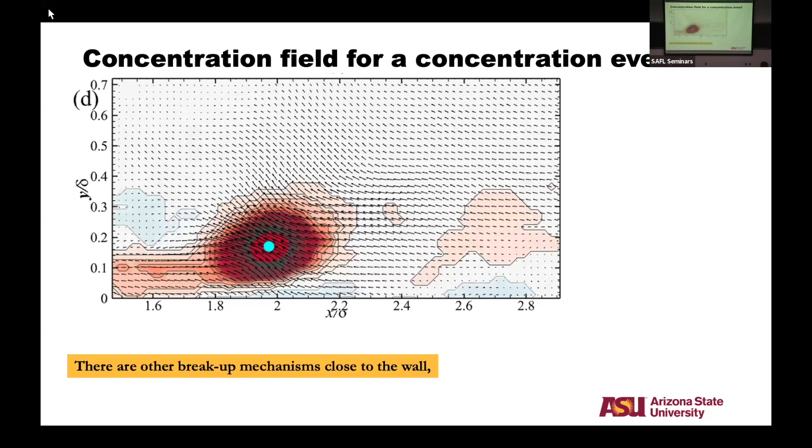Yeah, I think if we go to this video, this tells you. So it's usually related to how far this vortex can go. Some of these vortices are of the order of boundary layer thickness. Maybe if I go much further downstream, they might end up further out, and they would obviously be more diffuse. We don't know that, but given that this vortex is here, probably it will get there, maybe in a more diffuse manner. Sure, yeah, it's a good question. I don't know. Thank you.

I'm giving it to Jerome, but I had one question related to this so I'm taking a little bit of time away. Back in the days, we discussed a lot about the spacing between vortical structures, whether it's viscous wall units or delta. So you're normalizing everything with delta here - is that like a 50-50 chance, or did you think about it?

I have not thought about it, but the Reynolds number here, RE tau, is about 900. So we usually have at most one hierarchy of vortex structure. We have not scaled anything in the horizontal direction, but now that I think about it, that's probably a good idea to look at, because at different heights they would be closer or further apart.

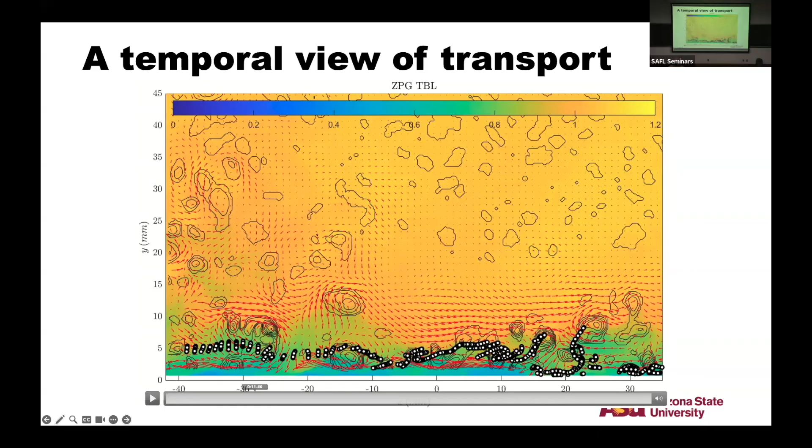The second question is related to the experimental setup you showed at the very end. Is that a dual plane PIV setup, like you're doing stereoscopic PIV on two parallel laser planes? You're talking about the scalar transport? The very last video you showed, the 3D particle tracks. Oh, this one, yeah. This is done separately, at different planes. At different time? Different times, oh okay.

Yeah, they're not simultaneous. Oh, it looks like this is not a parallel simultaneous planes. Okay, right. I would need four more cameras. Yeah, that's why I was curious about something else, because I remember there was a point where you had this parallel plane setup. People are trying to resolve 3D flows, and they do stereoscopic PIV on two planes so they can calculate velocity gradient. But eventually that was kind of completely replaced by tomographic PIV.

So is this two different planes? Yes, this is two different times, two different experiments. But you're using four cameras looking at one plane? Yeah, so this is a volume, it's very thin. You're still doing tomographic PIV but for a very shallow volume. Yeah, so this is the shake-the-box thing that they have. So we are doing both. Partly because I was not entirely confident with shake-the-box working well in air, but I was pleasantly surprised at how well it works.

But there are some limitations, I can go on and on about that. I do think Tomo PIV is a better way to go with this if we don't need the time information. But we're processing both with the particle data that we have. All right, thank you.